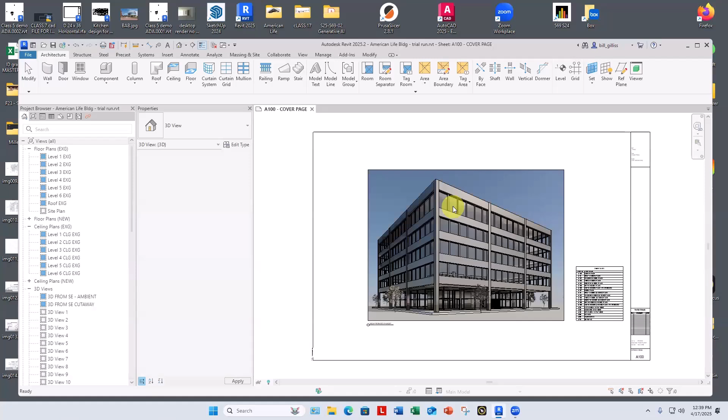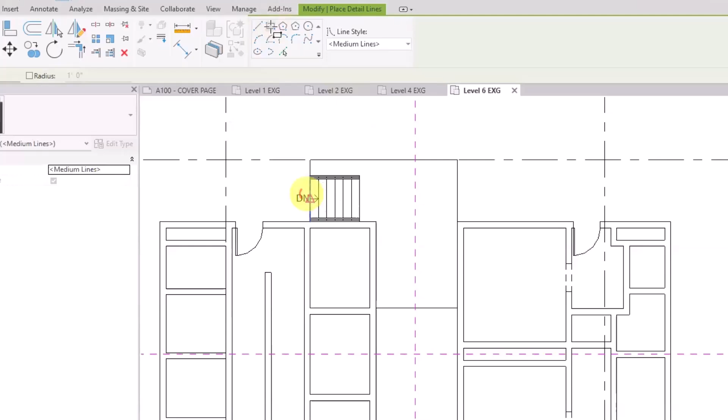Let's go. So to start with the cheating that's not really cheating - you've got your 3D elevators down here on the first floor, but let's say here on level 6, you want to indicate there's an elevator here, and for whatever reason you just want to draw it instead of modeling it. In any 2D view - plan, section, or elevation view, or callouts from them, not 3D views - we can go to Annotate, Detail Line, Rectangle, draw it, and then put the X in there, which typically indicates an elevator cab. This is really all we need to do to say there's an elevator there.

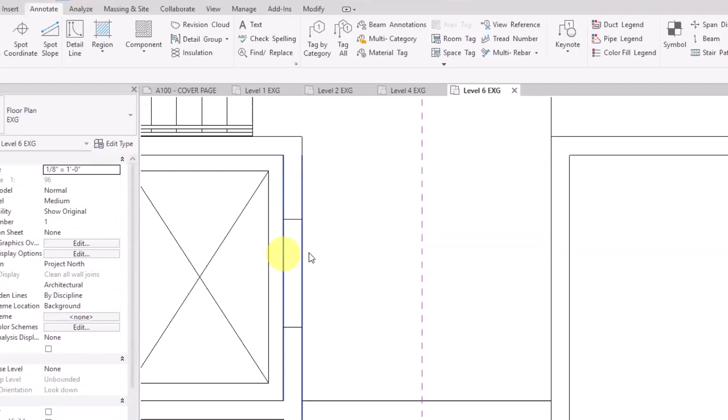We do have this door issue, so let me show how we can make it look like there's a door there without actually putting one in. I use DL again to put some lines across, copy that down, and I want to get rid of this part right here. Hiding it would make the whole wall disappear, and changing its line style to invisible would make that whole side of the wall disappear.

So what I'm going to do is just paint on top of this outside line with a white line. This is cheating, just so you know - it's like when this is the only way, you've got 6 minutes to get this drawing onto the plotter and you don't know where the thing is. So for this, if I go into draw line, DL, I don't have a white line to do that with.

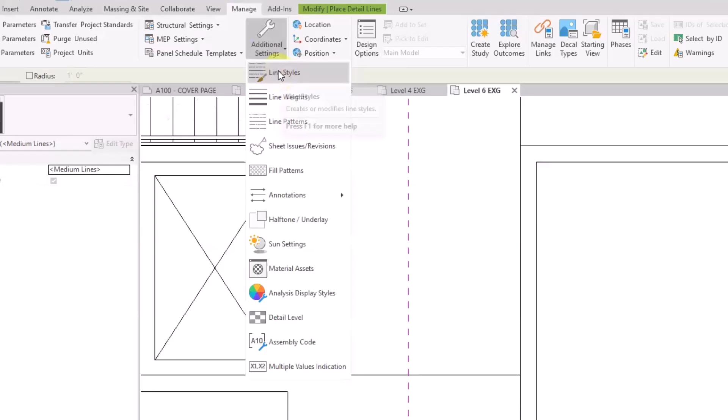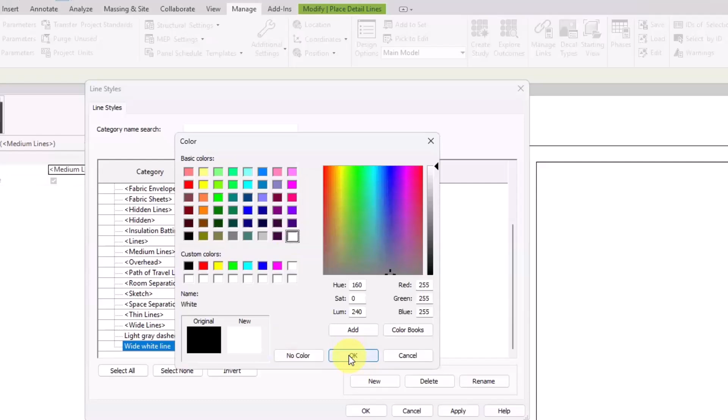So we're going to have to do a couple things here - I'm skipping around a bit, but just to give you a sense of the options, then we'll go back and look at them. I can go into Manage, Additional Settings, Line Styles, and if we open that up we see all the lines we have here. I'm going to create a new line style called wide white line - it'll show up over here. I'm going to say that it's white, and make its width - this goes from 1 to 16 or something - I'll just make it 5.

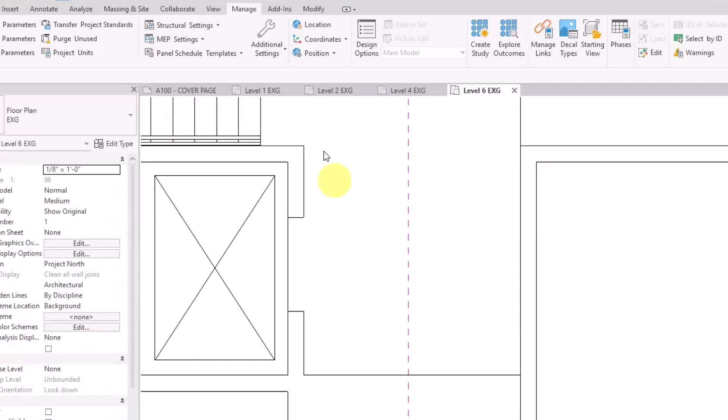Apply. So now, sort of the same way that in Photoshop you can erase things by pixels, now I'm going to do DL, pick my wide white line, and just do it from there to there, and it just hides it. This one I want to leave because that's the edge dropping down into the pit. And then if I want to put my doors in, I could go DL and do some little rectangles, whatever they do - oh, I have to get out of wide white lines now.

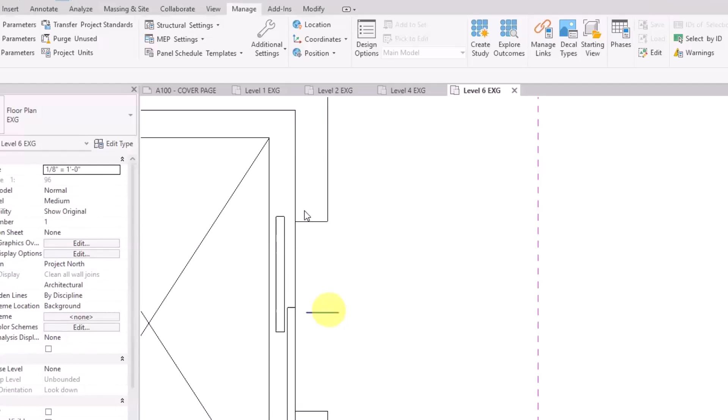DL, just regular medium lines, rectangle - I guess they're smaller, huh. And I can copy that down to there or something. Whoops, oh, I copied this piece as well. So there's an elevator, and you could copy that as needed.

A similar tool for individual line segments is to make them invisible. Let's say your plan was to have the last 3 risers be arced instead of straight - instead of these 3 straight risers, you wanted something going out like that. So I'm going to draw those arcs first, then come back and erase these other three - well, not actually erase, but make them go away in this view. Again, DL.

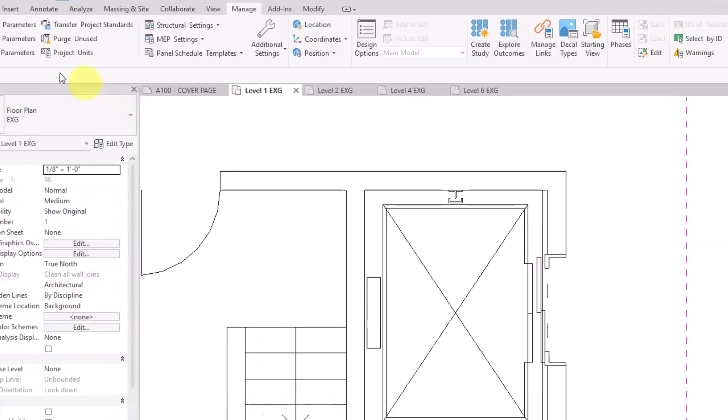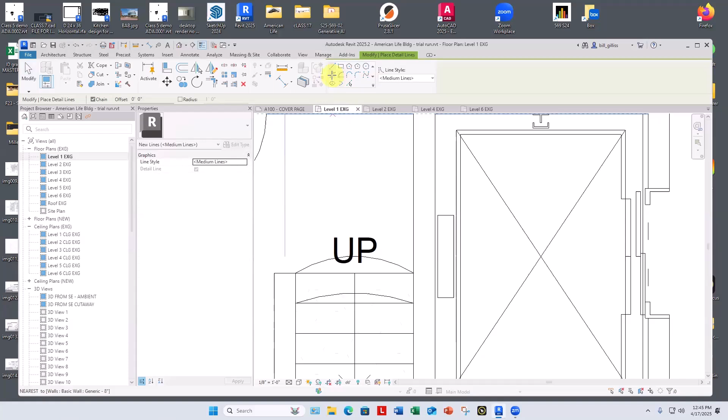Arc - I'll do the first one here, let's say that's my bottom one. Do it again here - I guess they're getting a little less steep each time. DL. Oops, gotta keep picking arc, it's sort of a pain. Arc.

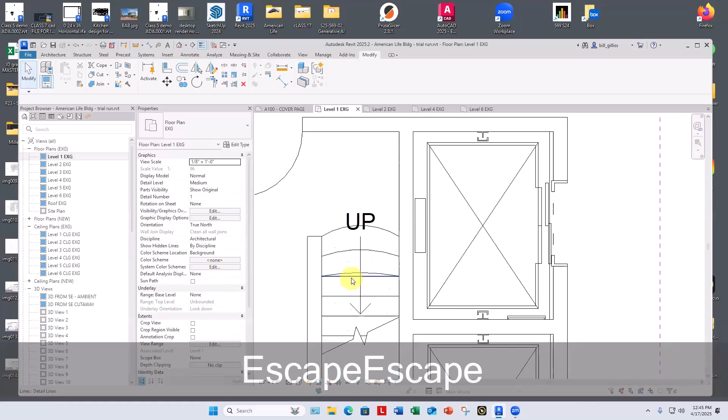Yeah, something like that—and that's a line I drew by mistake. I'll come back and turn these first three off with modify invisible lines, just pick those three. Then we have our staircase—I drew some extra lines in there by mistake.

Voila, there it's done. As long as you're not showing the bottom of that stair in a 3D view, you're golden—it doesn't change the 3D stair at all. If you got a section through it, the risers would still be where they were originally.

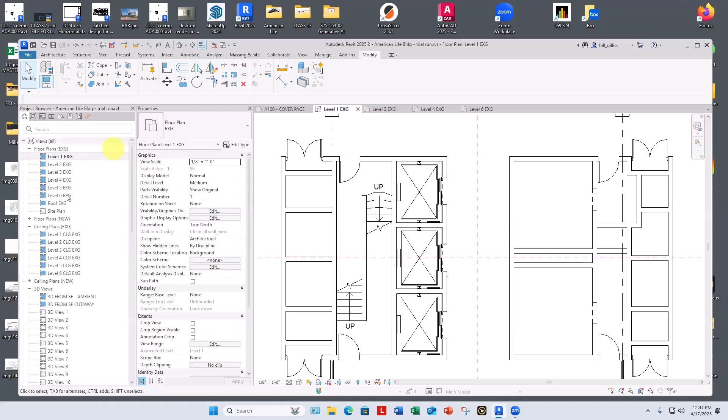You can draw on sheets though. Let me go to a different sheet. Let's say you had two different views of something and wanted to establish how they were connected to each other. Out here on the sheet itself, which is two-dimensional, we can also use DL, detail line.

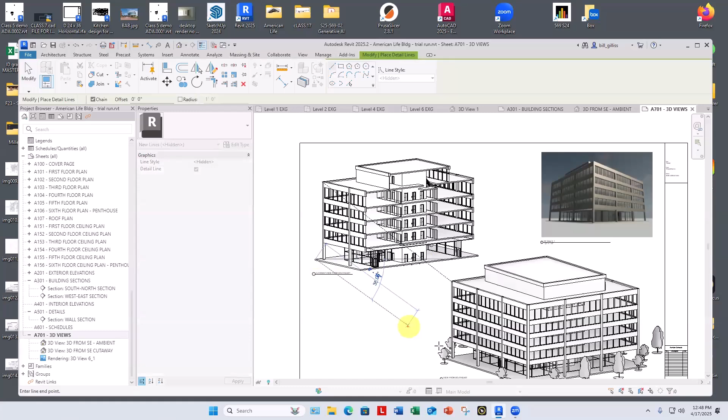I'll pick these right now and say from here to here is some important relationship I want to make clear. I can pick that and type CS for create similar, and bring that from down here to down here. So you start establishing relationships on the drawing sheet between things.

But these—if you move that, you've got to move these guys too. They're just sitting on top of the views that are on the sheet.

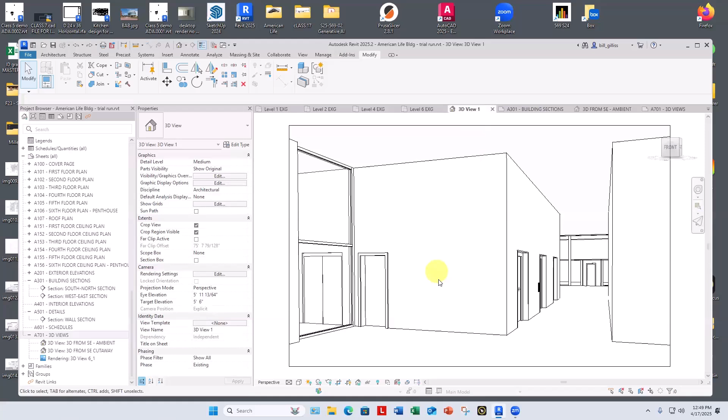Let's talk about what we can do in a 3D view. Let me go to my 3D view. In this one, if we wanted to put something on this wall, draw a circle on this wall for whatever reason—not a decal, just something we're drawing—we can draw under architecture model lines.

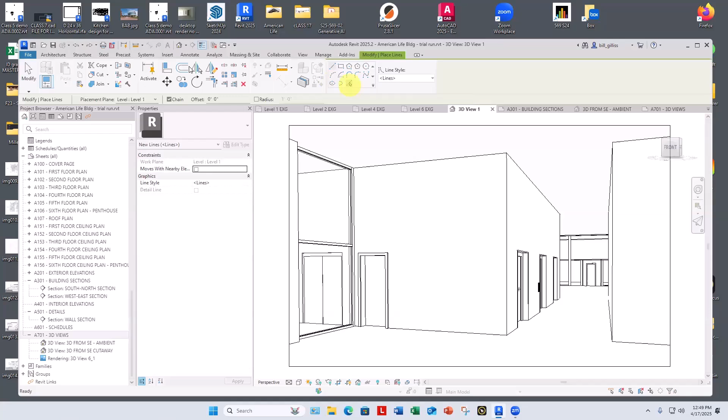These are true three-dimensional objects in space. We're going to have to tell it—actually, let's do this: architecture, set our work plane to this wall plane right there.

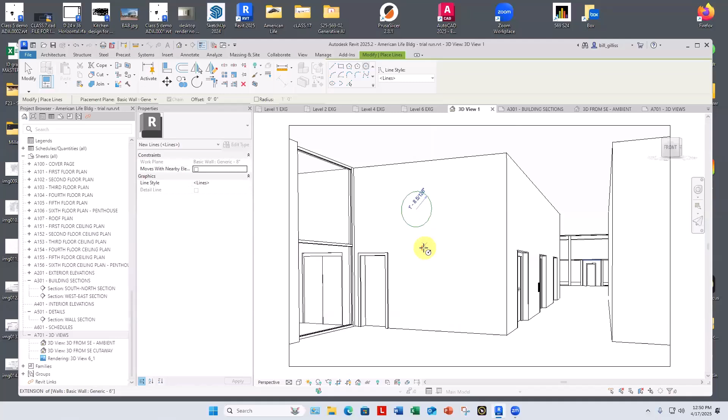And now we're drawing on this plane right here, with LI as the shortcut for model lines. Now I can draw a circle on this line, on this wall, and we see that it moves around with that wall. So that's in animations, that's in any 3D view you want—know that it's a tool that's available to you in 3D.

We get into a view like this, LI for model line. Right now it thinks I'm drawing on the floor. If I just draw here, that's actually going to end up back behind the building somewhere, because we're drawing on level 1, which is no end of confusing.

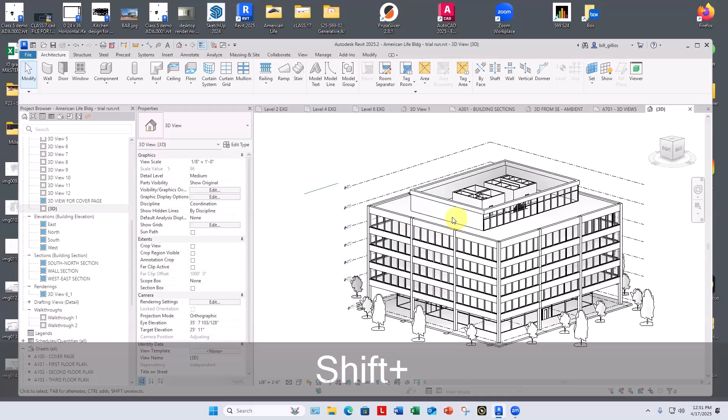So to be able to draw on this wall, I need first to set the work plane. Well, the faster way to do that is to pick a plane—wait till you've got there, click it, LI because it's a 3D model line. Put that up here, and then we can see that move around.

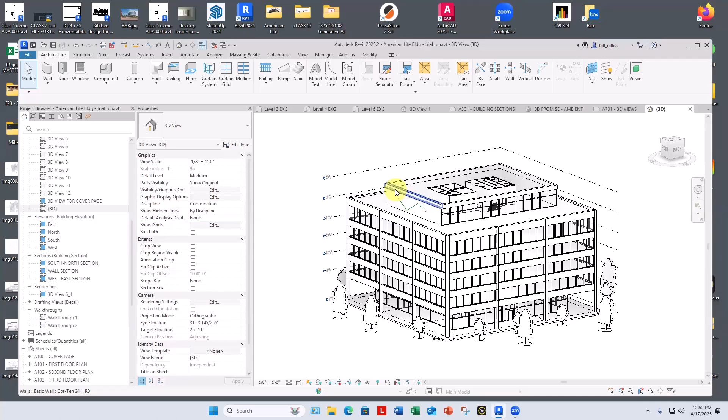So if you wanted to put, every 8 feet, a line indicating a joint between two panels or something—but you don't want to model that joint—you can just draw that joint and copy it over every few feet, and those guys will be there.

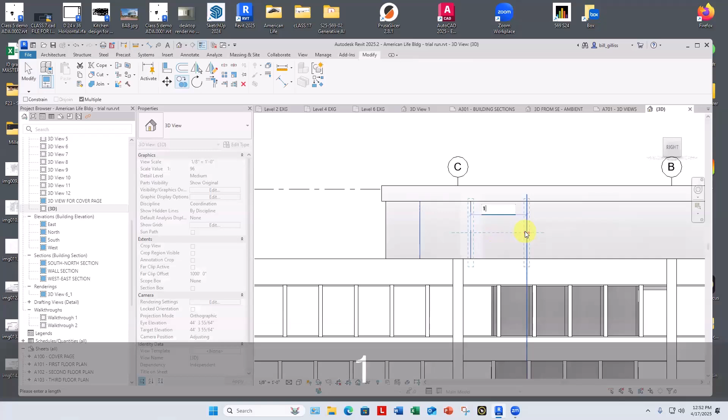We can go back into this elevation view. In fact, let's do that. LI. Then copy—let's do 10 feet. 10, 10, 10.

So then we can see that those are there. That one got copied up a little bit, I guess.

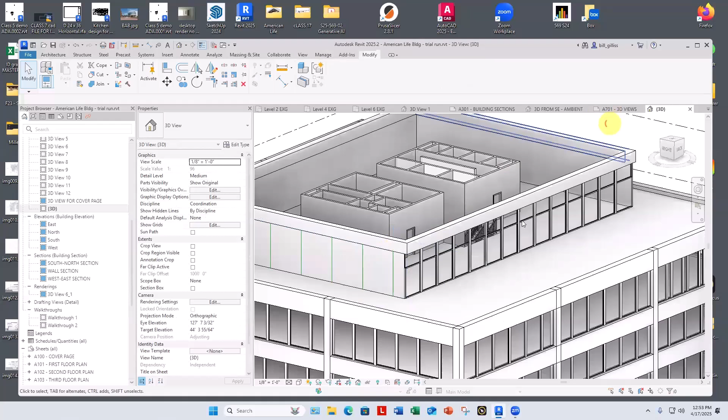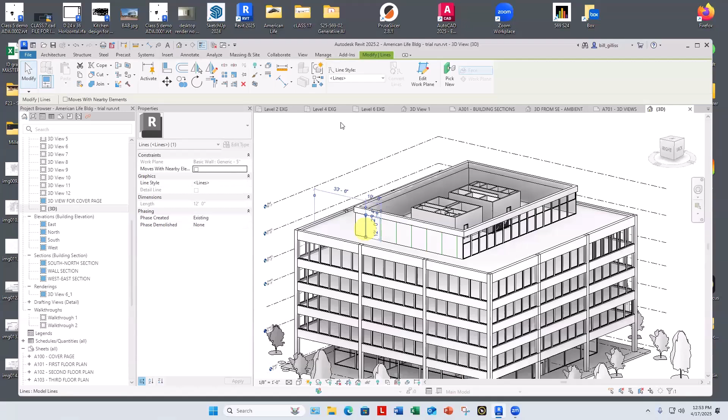When you just use the line tool, DL and LI, and pick lines, by default those are green, and I think that's to call your attention to the fact that they are 3D—they're not just flat detail lines. So once you pick them, you can select it and then change it to something like medium lines, and it'll be black.

Let's do that. I could have done that ahead of time to the first one, or I could have just started drawing them with medium lines in the first place instead of with lines.

Any line that's here, without having to pick anything, we can just go to modify the line work. Let's make these something where we can really tell it's the demolished line. You just start doing that.

For 3D model elements, a change of line style will apply only to the view it was changed in. For model lines, however, it will apply in all views. And of course, 2D detail lines will appear only in the view in which they were drawn.

So what if we would like longer dashes there? We saw that we could create a new line style with a new color, white, using Manage, Additional Settings, Line Styles.

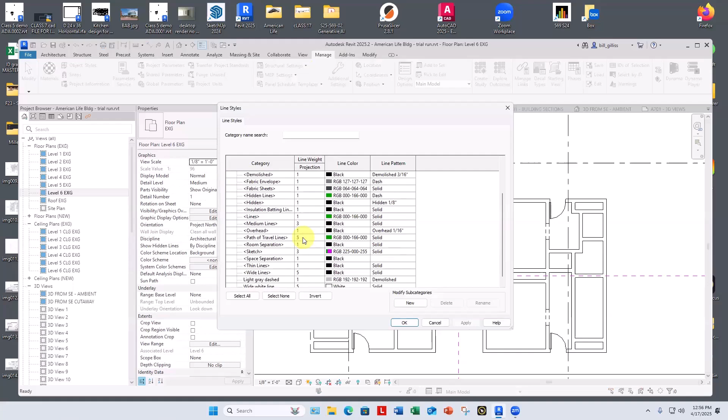And if, let's say, we want to make one that's red to call attention to things—so, line styles, new—I'll just call it red medium lines, why not. Let's make that a medium thickness, which is like a 3, and we'll make it red.

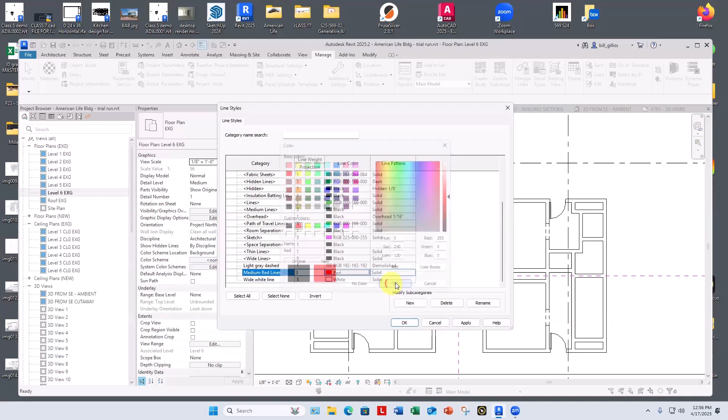So if I want to really call attention to something, I might just take all of these, take them one at a time, and change it to medium red. Or I could have just drawn the arrow after creating the medium red line style.

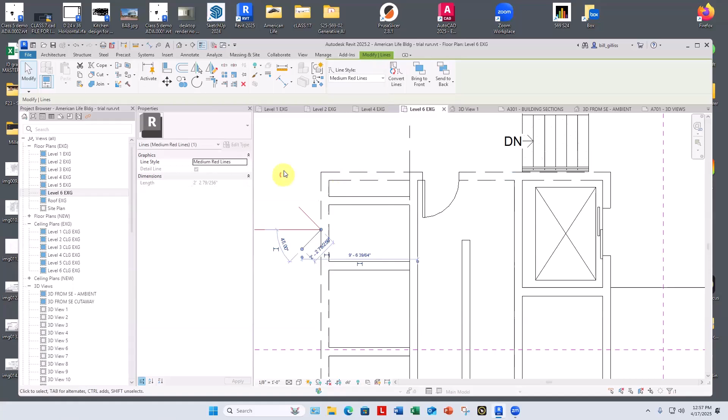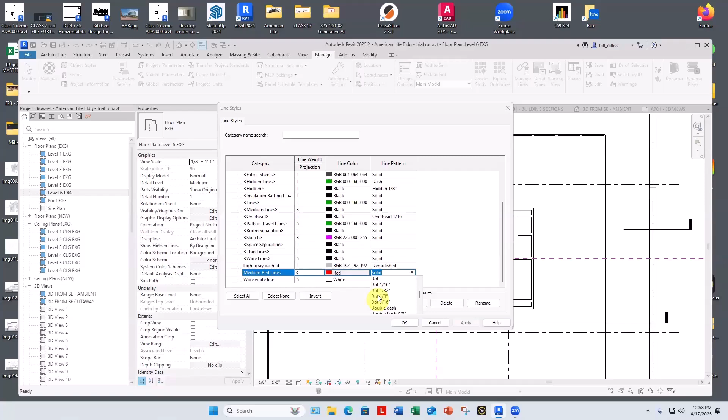Let's say we wanted that medium red to be a finely dashed line. We can drop down here and pick from a number of patterns already defined, which have this size thing where we can have 3 kinds of things in a line. We can have a space, a dash, or a dot, which is actually a very short line. But let's just say we want to make that a dotted line. Medium red lines want to be dotted, 1/8 inch, okay. And now we see that they're dotted, which is basically a very short dash.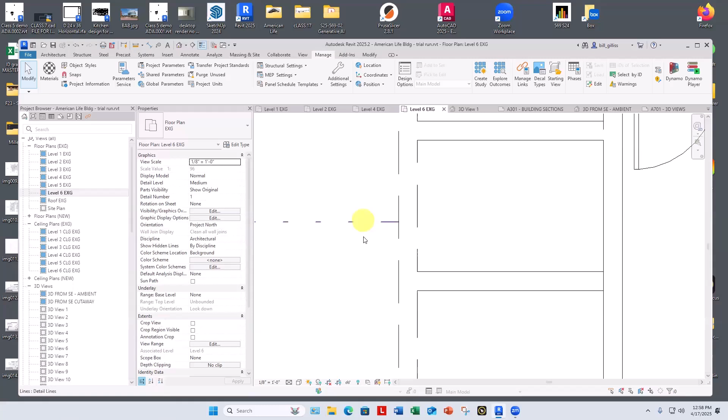Here's an extra piece of something in there. Yeah, so they basically put a dash at each end so you'll see it. That's automatic. So there'll be something there, then a space, then whatever else you've decided to do. And it always goes solid thing, then a space, then a solid thing, then a space, then a solid thing, then a space.

So let's say we want to make those long. I would like to create a whole new pattern. Let's go take a look at this, and this will be how these appear when they're plotted. It has nothing to do with this being 8 inches and looking like it's about 6 inches. When we're plotted, this is like 1/8 of an inch, and that's like 3/16 of an inch or something like that. So it's always plotted.

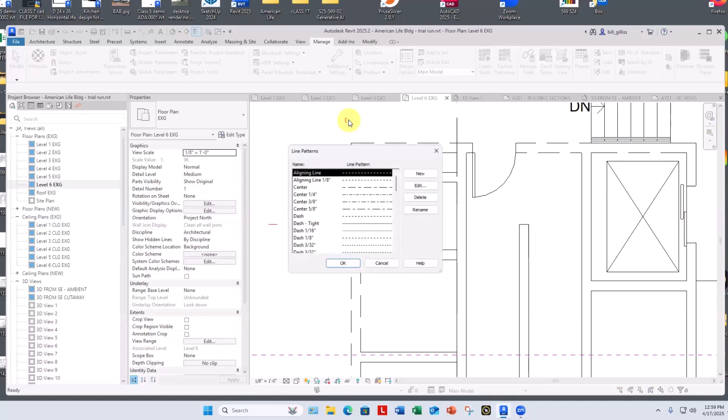So if we go to manage additional settings, line patterns, let's take a look at one. Let's just take this one called aligning line 1/8 inch. It looks like it's a 1/8 inch space, 1/8 inch dash, 1/8 inch space. And if we go to edit it, we can see that's just what's happening there: a dash, 1/8 space, 1/8. And that will be the plotted lengths of things, regardless of the scale of each view.

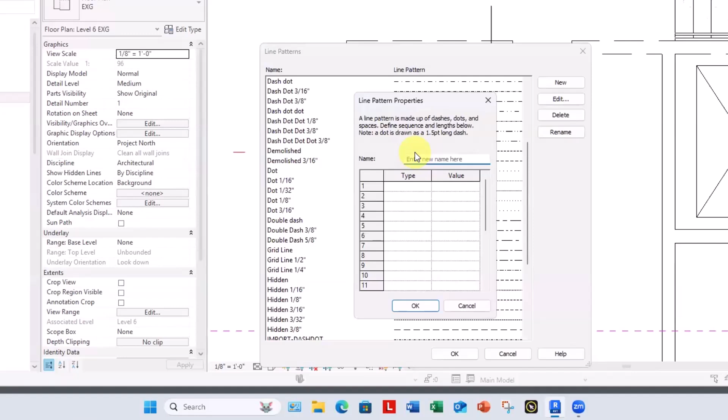So if we wanted to create a new one, that was, we'll call this long dash, really long dash. Lines need to start with a dot or a dash. I'm going to choose dash, and I'm going to make that 1 inch long. And then the next thing can only be a space. We can't stack 2 dashes right next to each other touching in a row, or a dash and a dot that way. And I'm going to make that a 1/2 inch.

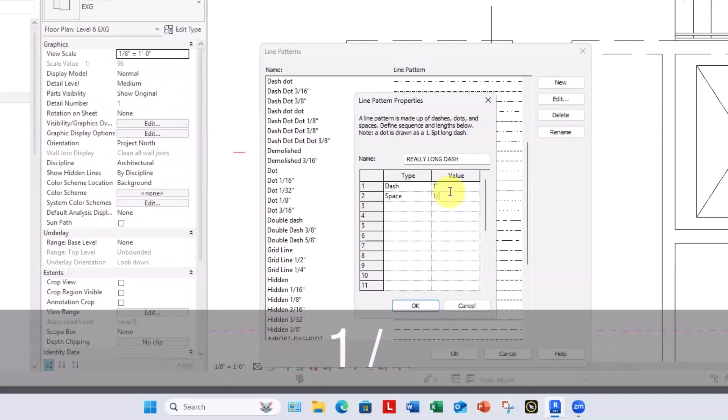And I think that's all we have to do. And that'll just repeat and repeat and repeat. Okay, so there's that. You can see it's much longer than any of those other guys. Let's just draw one first with... I've created the pattern, but I haven't given it to a line style yet. I've just created a pattern.

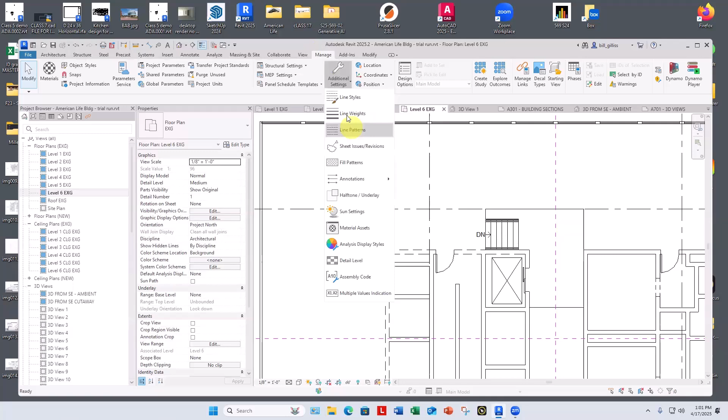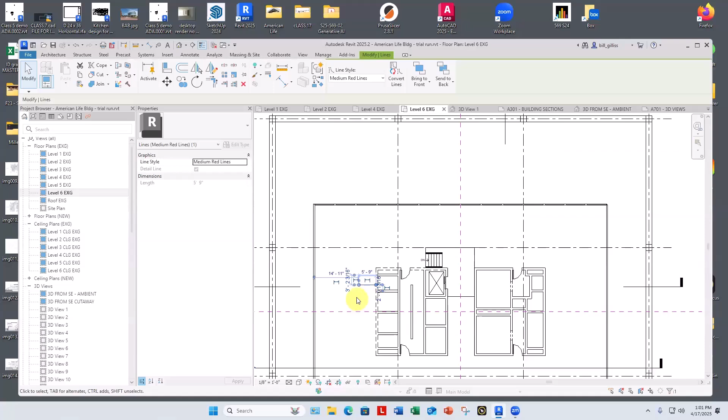Manage additional settings, line styles. Now here is where I can apply this pattern we just created to one of our new line styles. Medium red line, I'm going to change that to our new pattern, really long dash. Okay, so there's that, and I have to stretch this out before that even starts showing up.

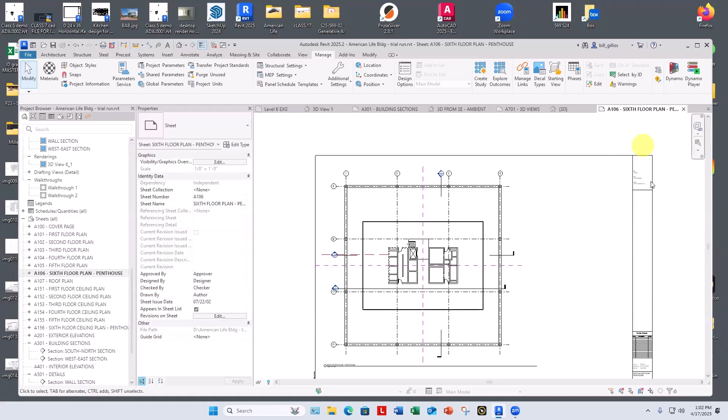But if we go back to where this is on a sheet, my level 6 floor plan here, 6 floor plan penthouse, we can see that in the scale of this 24 by 36 inch title block, or 22 by 34 or whatever, the dash is 1 inch long and the gap is a 1/2 inch. If we reduce the scale of this viewport from 1/8 to even a 1/16, these are still, relative to the paper size, 1 inch and a 1/2 inch and 1 inch.

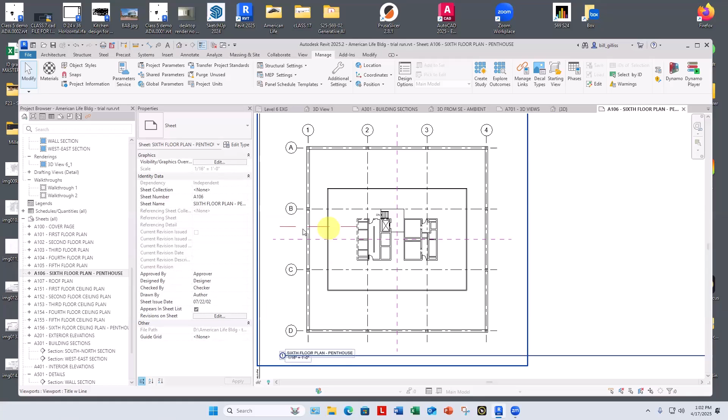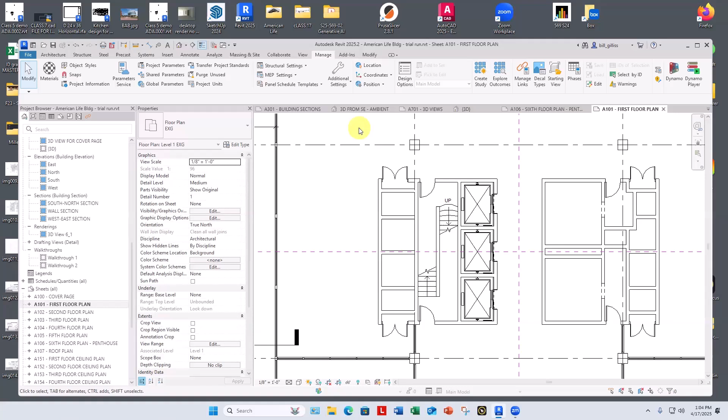Okay, let's get back to my level 1. Let's say I wanted this whole interior of this whole thing not to be visible. Let's say I just wanted to print this out so I could just sketch in there without stairs, without elevators, any of that kind of stuff. It would be a really tedious thing to do with white lines. But I would like to use the idea of a white line, but as a region, just a big white thing that's covering this up.

Let's go into the view itself, just to be really clear about it. Let's go back to level 1 existing. And under annotate, we can go to region.

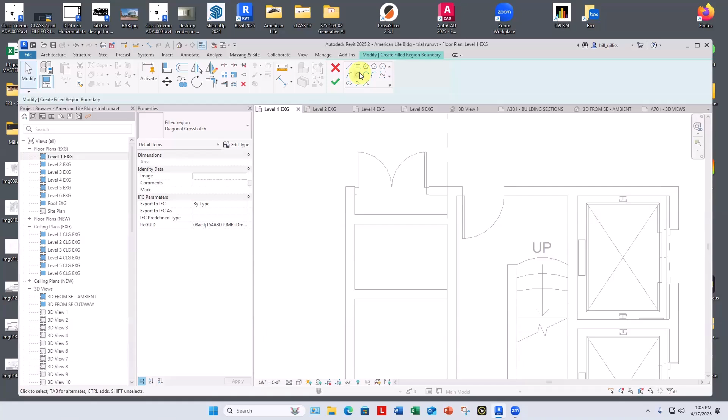Filled region. This is the area I want to be hidden. Right there. Oh, those little guys pop up. I'll get rid of them for now. But to make that really go away, I want it just to be solid white.

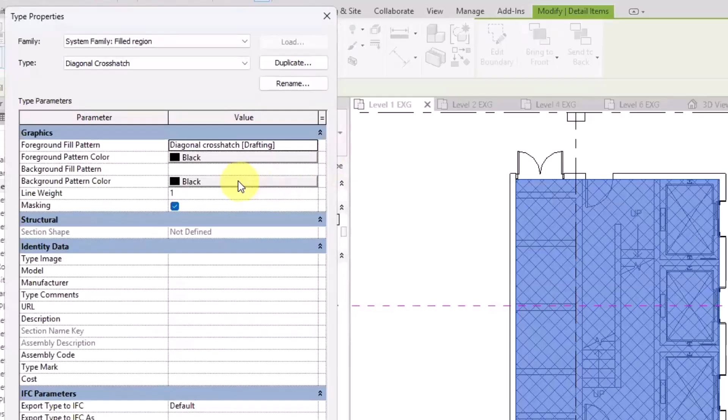So we can pick it, and then we'll look to see if there's already a solid white pattern defined. No, there's solid black, but that's not what we're looking for. So I'll pick this, and just like anything else, when something's close but not just right, we just go to edit type, and edit type duplicate. I'm just going to call this solid white, which is what a masking region would have been to start with. Solid white. And the foreground fill pattern will be solid fill, but its color will be white instead of black. Apply.

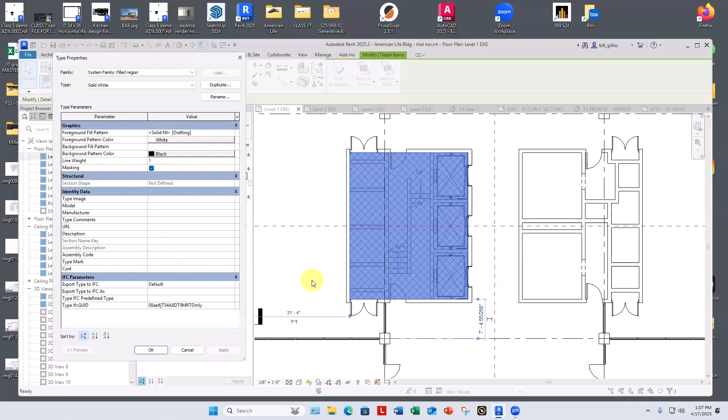Okay, so it just goes away. And all of this 2D stuff conceptually sits on top of the 3D ones, so that it will always opaque what's underneath. And I think I need to decide what to do with this line, this edge.

Let's say I want that to go away as well. I don't want this across here. I don't want this across here, across there.

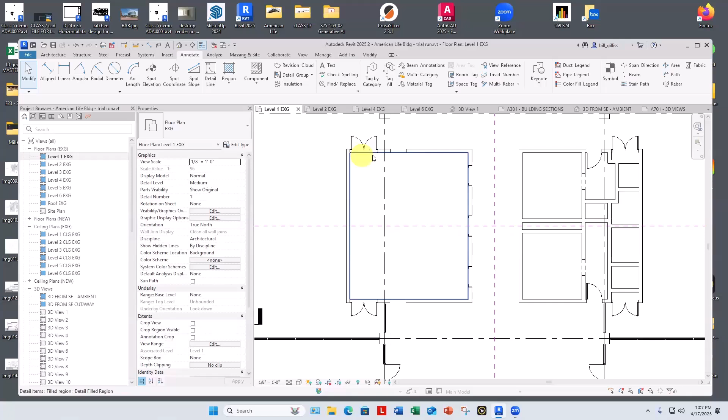I can now select the filled region and go to edit boundary. And now I can pick these individual lines and use my wide white line for them so that they will become white and not show up anywhere.

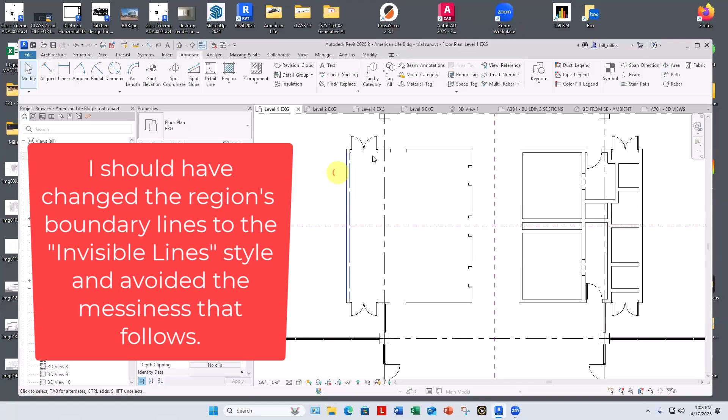Now, at this point, I probably want to just cheat these inside a little tiny bit. Remember, we're cheating here, so that the edges of those walls, the inside edges of those walls, would show up.

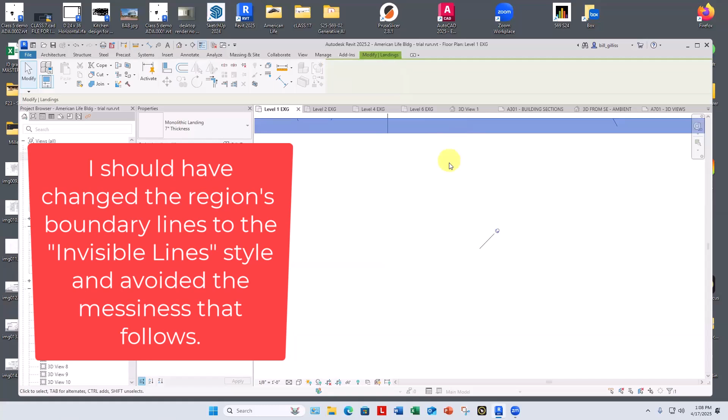And this is just this one view. We're not messing with... where did that go? So do that kind of thing. Hide whatever you need and have a choice of whether the lines are visible or not.

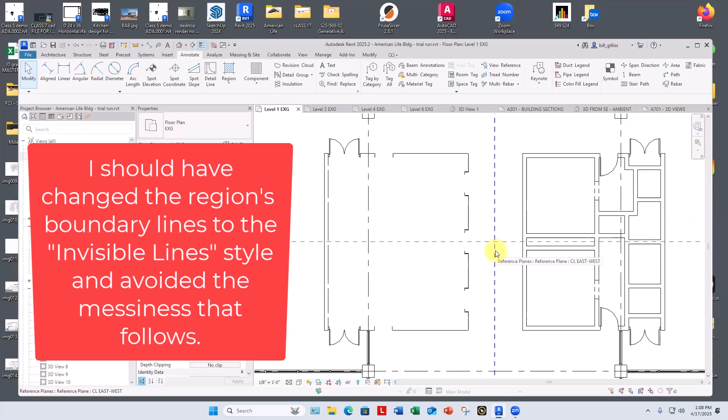Make this look a little more convincing. Just pull these in a tiny amount, just enough to see those walls. Not enough.

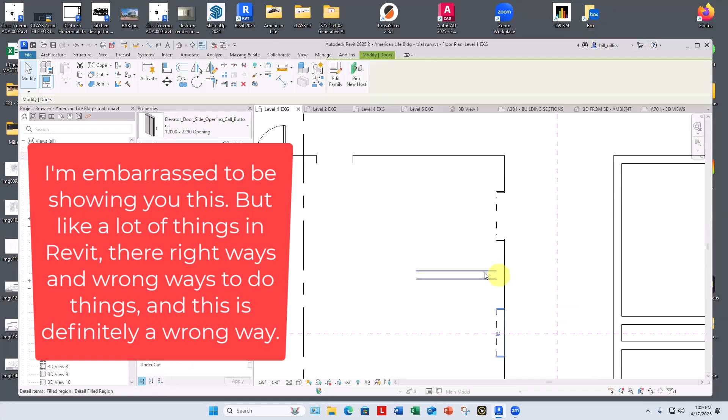I'm going to get rid of that. Just silly. If you want your walls, this wall looks strong. We can really see that.

Sometimes when you print floor plans black on white and put it up on the wall, they look good and strong here, but you get 10 feet away from them, they're just hard to see. So what you might want to do, and this is view by view, is just to make all these walls shaded.

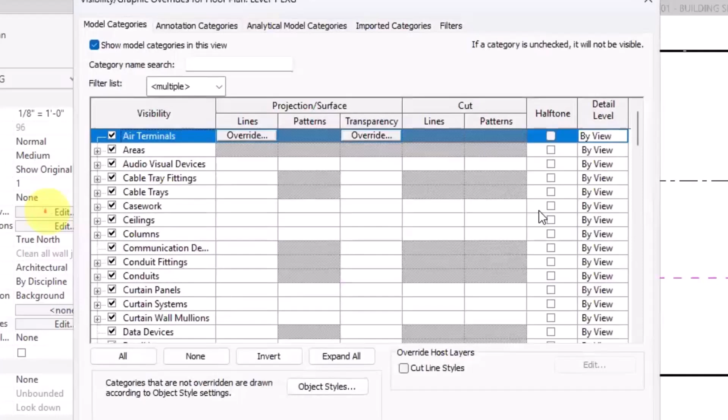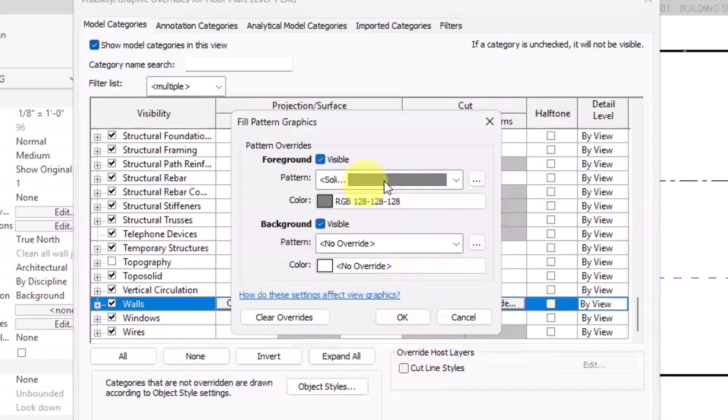We can go into visibility graphics overrides and scroll down to walls and say wherever they are cut, wherever a wall is cut, I want to see a pattern that's solid fill and let's say dark gray. So all our walls will be filled in with this wherever we cut through them.

So we get them really popping out like that. And look, these are columns. What's good for the goose is good for the gander. Let's go back to visibility graphic overrides and say wherever columns are cut, we want the pattern to be solid fill and dark gray.

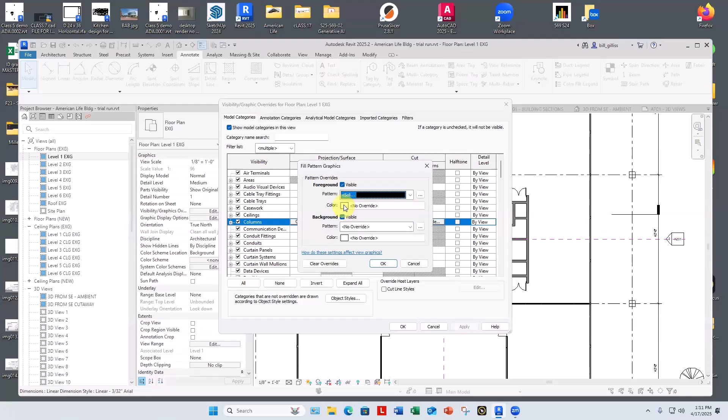So that really starts giving you much more of a sense of how that building is put together, especially these guys out here starting to relate to the ones inside. If we're talking about just adding little presentation qualities to this, even though this is mostly an interior space...

we can turn shadows on here to see them as if we lifted off the second floors and everything above it, and we're just shining the sunlight into this floor. And that would be with Graphic Display Options, which we can access over here or over here. It's the same thing, and I'm thinking of just sort of presentational pop now.

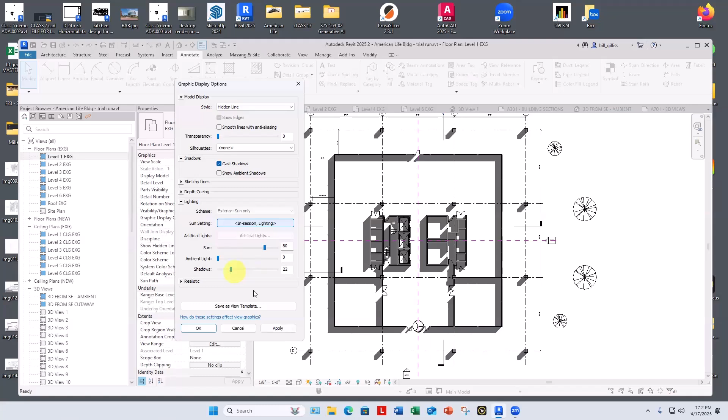We can just say lighting - oh sorry, shadows. Just show me some cast shadows, which is a little strong. But down here where we see the shadow slider, we can decide to make that just a more muted sort of thing. And now you're starting to get a sense of three-dimensionality from the two-dimensional plan, which I think is appropriate.

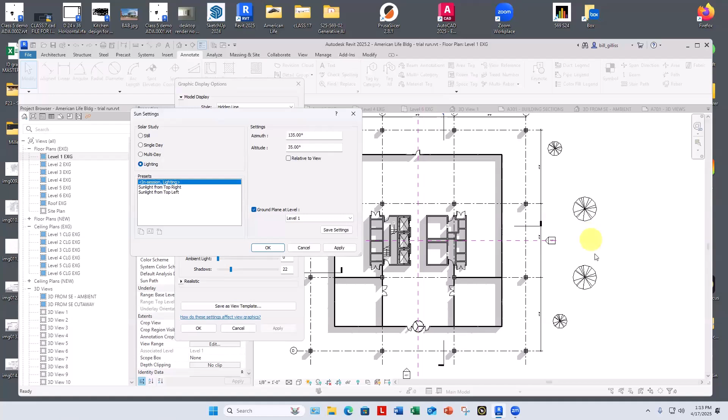That's not the right sun direction. If anything, the sun would be coming from the south. So let's go up to sun settings where we've done before. Let's say 0, 90, 180, let's say 170.

Why? That's nearly, I guess I need more of an angle here. Let's take this over here to the west. This is 225 from over here.

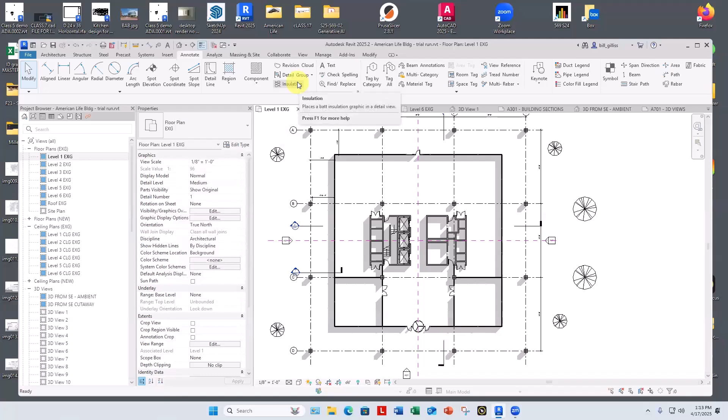225. Is that what I got there? That's not right, just a second. Yeah, let me try to get to come from here up in that direction. Graphic display options, lighting, in session lighting.

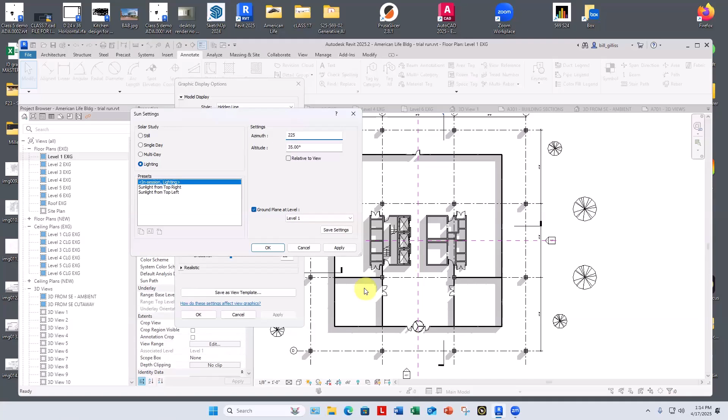So let's say I want this to be 225 azimuth, which is coming in this way from the southwest, and apply it. Okay, that's what I wanted. So you'd have to figure out what worked best with your plan, and is it always from the same direction and that kind of stuff, but you can do this.

Okay, let's imagine that on a sheet, let's go back to my building section sheet. I wanted to have a photograph here that had text and arrows and maybe an existing conditions photograph we wanted to do. A couple ways to do that.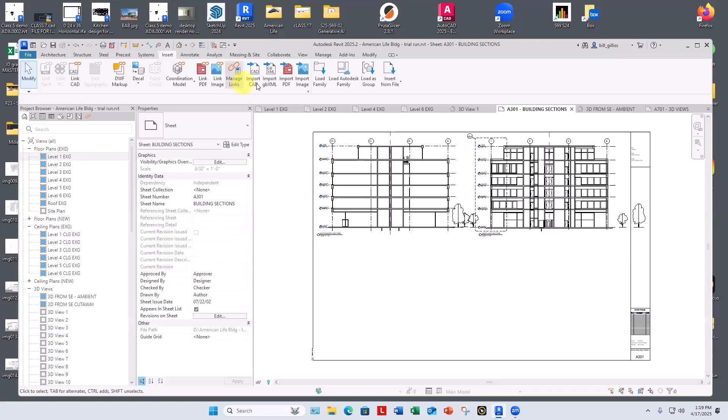One, I could just bring in a photograph with insert, import image. I wasn't expecting it to be on this computer. Okay, this is the dock that I'm repairing.

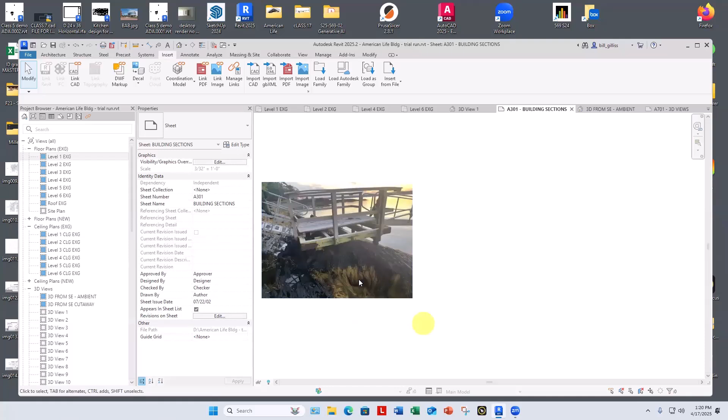I could bring this in here, and I want to put some arrows and circles on this that say note damaged supports that need whatever. The problem is if I just put those here, those would all be separate things. There'd be a photograph, there'd be a text, there'd be an arrow, something or other, and there wouldn't be a view label down here that I could use to refer to that view. Maybe in some notes, I want to say, look at detail 3 on sheet, whatever this is, A301 building sections.

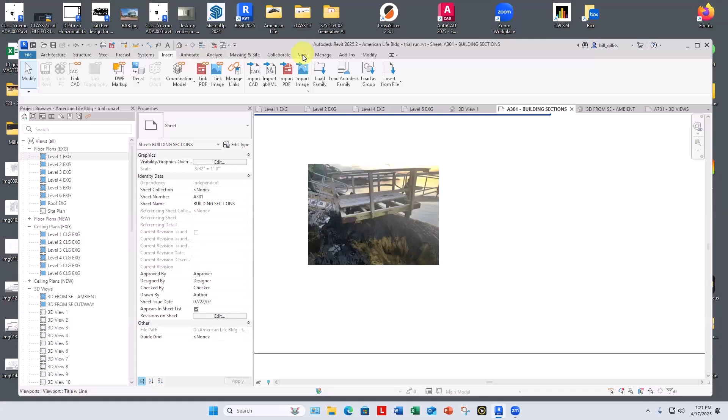So instead of that, Revit has something very handy, which is called a drafting view. And like all views, you just create it with the view tool, and we're just going to pick drafting view. Because I want to be able to size the photograph to make it on the page be like 4 by 6 inches, I'm going to make this all be life size, 12 inches equals a foot. These can be done at scale, but this is the scale I'm using for this.

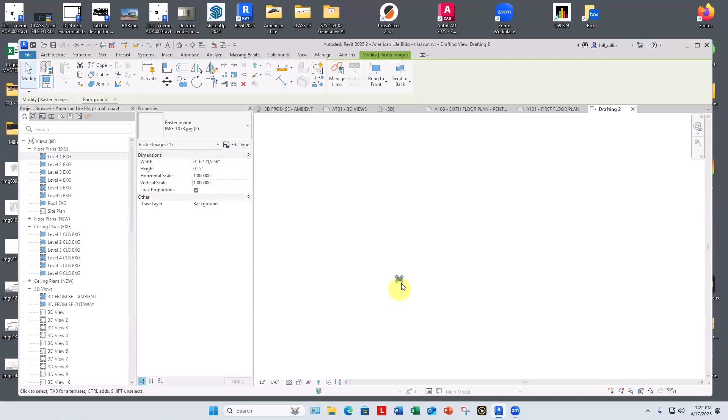So now we're in a drafting view. Here, I'll go get that photo, insert that same image, whichever it was, this one maybe. Oh, this is tiny, I see. I would just zoom way out.

And right here, I'll just say how big I want that to be. Here's the image, and let's say I want all my stuff on this sheet to be an even 6 inches high. And it will scale the other dimension up equally. So knowing that this is going to be 8 inches long, I can go place this view on the sheet.

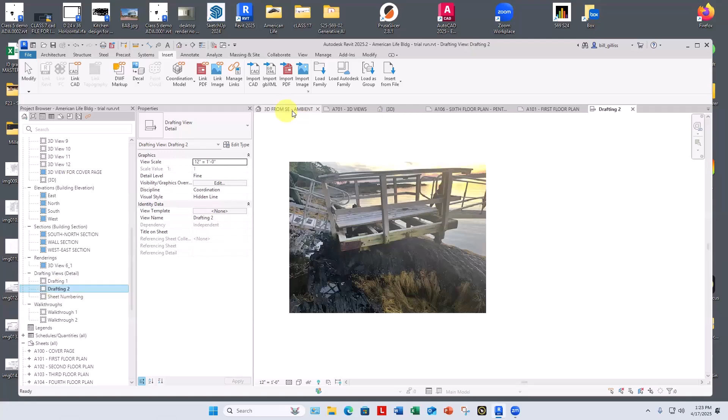This is now called Drafting View 2. There's a new folder for these drafting views because I've done some earlier ones. That's this one. If I go back to my, wherever I was, I'll say 3D view. I can bring drafting view 2 over here and place it, and now it's a photograph with a number, the 4th one placed on this sheet.

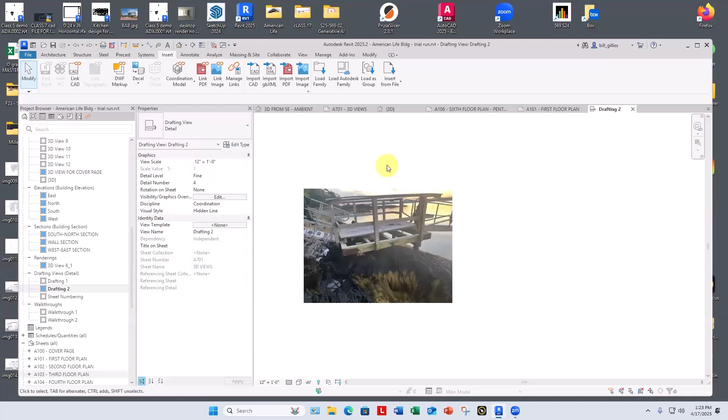And if I go back to that drafting view number 2, let's say I want a big white arrow to call people's attention to the structural failures here. I think I'll just do that with annotate region, filled region. I'll use that white one that we just made.

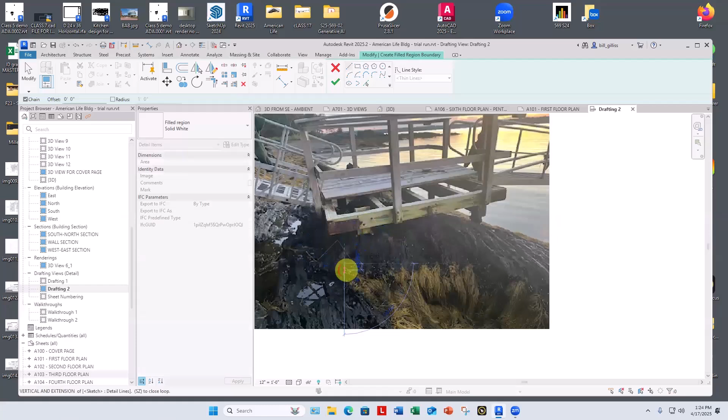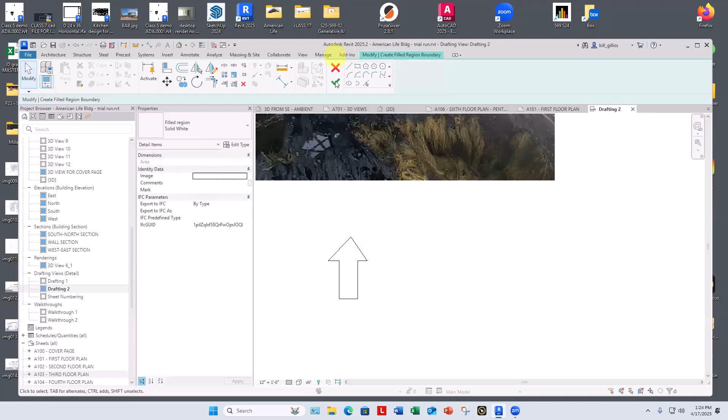And I'm just going to draw a big arrow. This could be any, that's a little difficult. Got to join the lines. Do you like that? And then maybe I add some text.

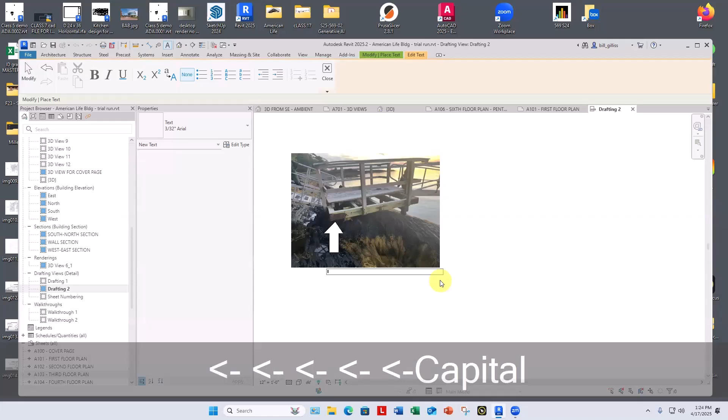Annotate text. We'll just put some text here. Note at... okay, and now that's note: storm damage at top of leg.

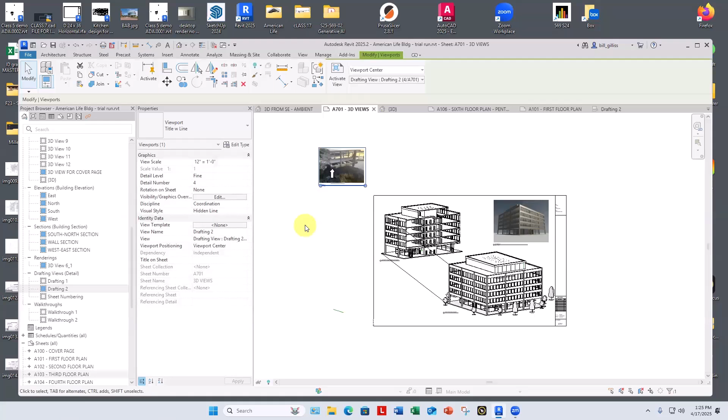And then we can go back to our floor here, and we see that the arrow and that, these will all move around as, sorry, Control Z, as one element. We don't have to worry about copying stuff around on the sheet together, and in fact, that's how I put together a lot of my drawings for that.

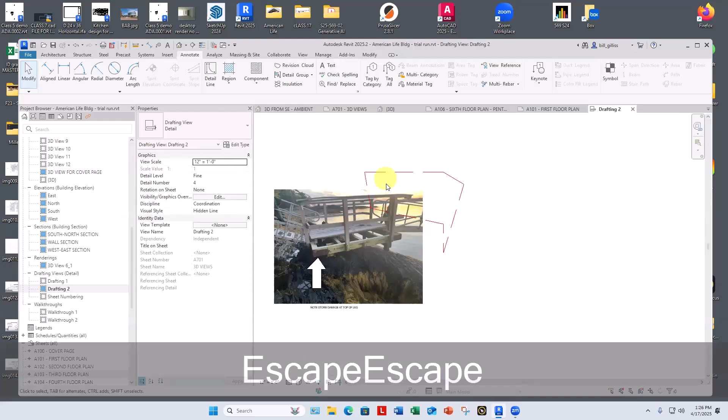So what can we have in a drafting view? We can have text and anything, basically anything two-dimensional. We have line work, which sort of corresponds as this, but we could be doing anything else we want there as well - dimensions, text, images, regions, and also detail components, which is something we haven't dealt with at all.

But just the way that I'll start another view, a drafting view. I'm going to call it corner detail, 45-degree corner detail.

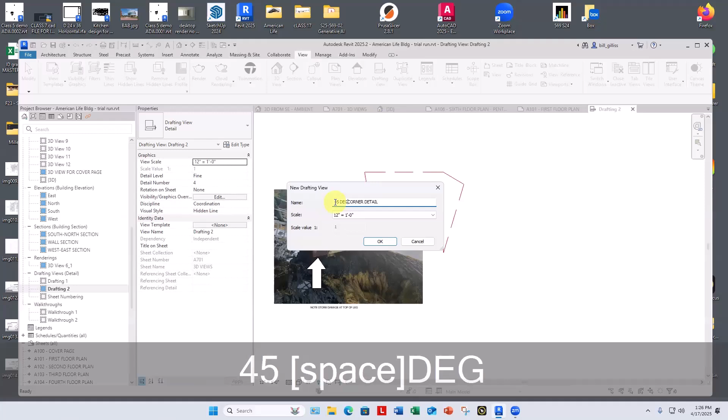This will show you how to navigate through the space and use Enscape's own materials and components in a basic way. Just to give you an example, I want to show you how to create architectural animations with the Enscape video. Since we did that in Revit, this is a pretty analogous comparison to how it works in Enscape, but I will let you explore that on your own.